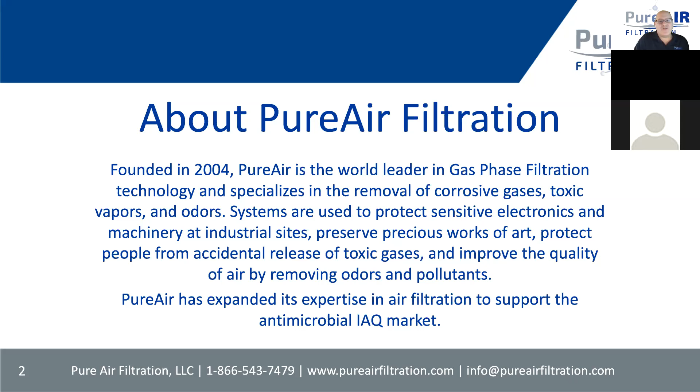I'm the FiberShield product manager at PureAir Filtration, and today we're covering antiviral products for indoor air quality. About PureAir Filtration, the company started in 2004 and is highly focused on gas phase filtration. You'll see why that's important. I say gas phase filtration because we're really focused on tiny particles, atomic level, microscopic, nanometer level particles.

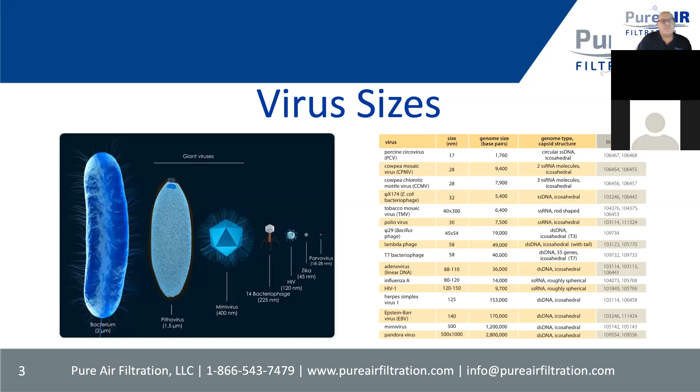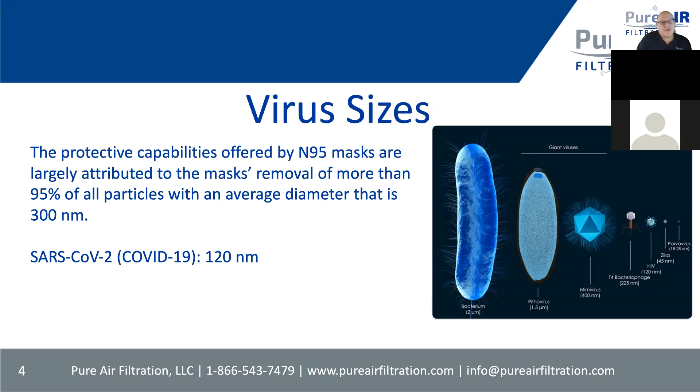Virus sizes are incredibly important. The SARS virus right now that we're all worried about is 120 nanometers. Let's focus on IAQ prior to SARS. Historically, we only focused on particulate and gas pollution, very little focus on microbial air quality. And the microbes were only concerned in hospitals and what have you.

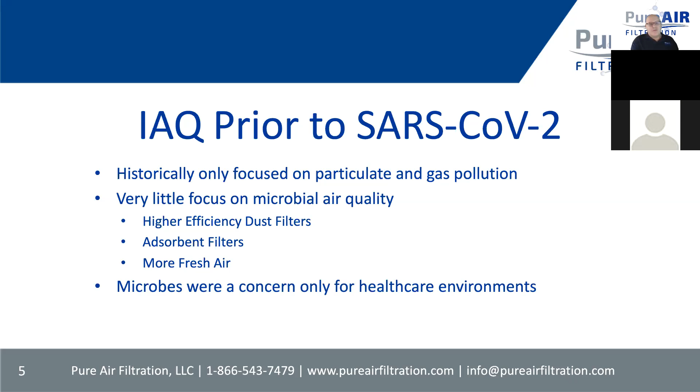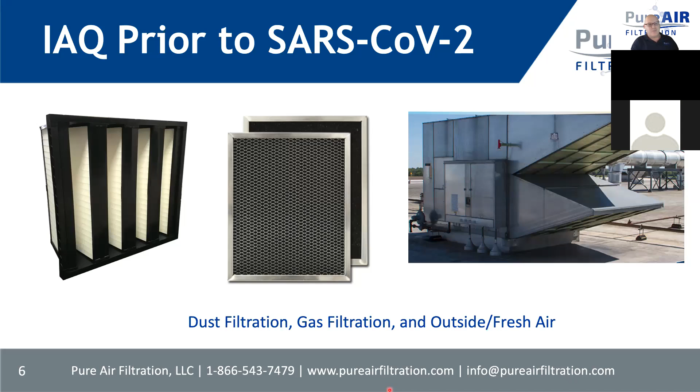These are some typical products that you've seen with dust filtration on the left, gas filtration in the center, and then very large air movers and air handling units on the outside of buildings, moving lots of air, fresh air into the hospital or indoor air quality environment.

So more recently, microbials have become a major factor. We've seen lots of plastic and plexiglass going up in your banks, your grocery stores, everywhere that you go, including restaurants, but it's more increasingly occurring just in the normal workplace where your everyday workers come in and work in an office, not just a hospital, but it could also be a factory, what have you.

The virus of concern most recently is the SARS-CoV-2, which is the virus that causes COVID-19. But we've seen in the past talk about SARS, MERS, even the flu, other common microbials that occur throughout a year. The most recent one has everybody concerned, and rightfully so. But these types of activities have been going on for as long as the industrial world has been working together. As you recall, there was the Spanish flu of 1918, the Hong Kong flu in the 60s, several types of viruses and bacteria like this occur occasionally.

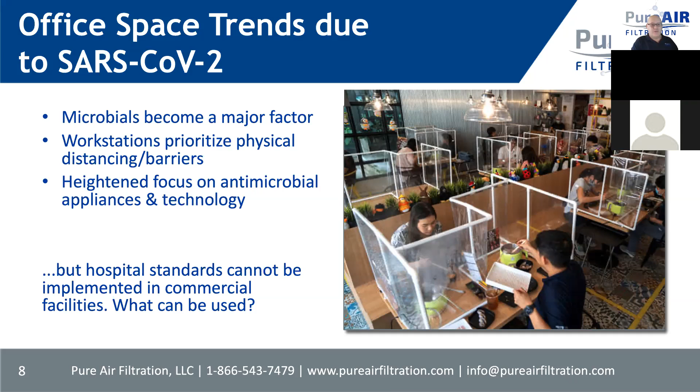We believe that once we get past this SARS-CoV-2 environment, we'll be seeing potentially more antimicrobial activity in offices and companies throughout the world. And that's one of the reasons we're having this webinar today, to discuss some of the solutions that we've developed.

Let's talk very briefly about what ASHRAE has recommended for HVAC modifications. Central HVAC, for more outside air to come in and flush away the aerosolized microbes. You'll find that that's an increasingly common theme here at PureAir, but also in the indoor air quality world, that moving air through the rooms, through the buildings where the people are, and getting more air changes per hour, and that air flushed through filtration systems is really the way to keep the people safe that are in the buildings that we're trying to protect.

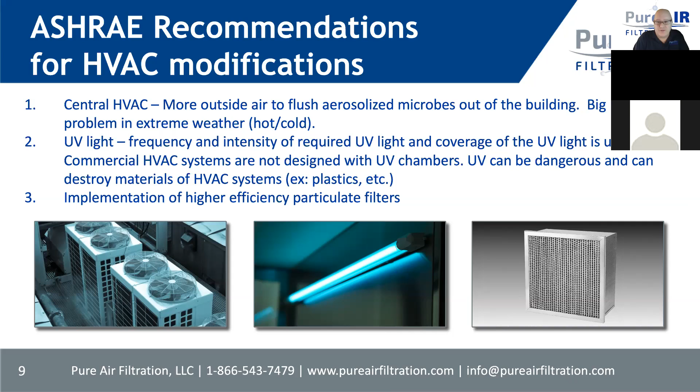UV light has a place in this as well. UV light has been proven to effectively eliminate many microbes, or at least help eliminate them. And then implementation of higher efficiency particulate filters to remove those aerosolized microbes.

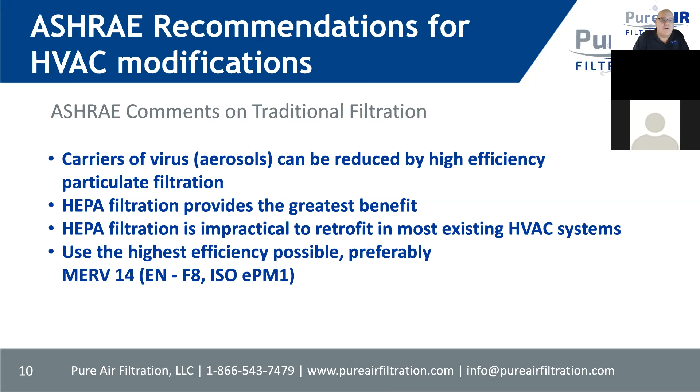ASHRAE recommendations for their comments on traditional filtration: the aerosols that we've talked about and you hear in the news quite often now are reduced by high efficiency particulate filtration, HEPA and the like. At this point, HEPA seems to be providing the greatest benefit. And it's impractical to retrofit these systems into existing HVAC applications. The highest efficiency available right now is MERV 14, generally at a cost point, and that's what we like to see, and that's what ASHRAE is recommending.

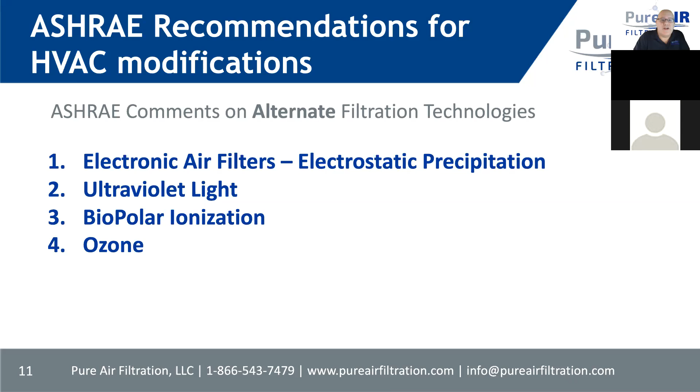So there's 4 alternate filtration technologies that ASHRAE has talked about. Electronic air filters, or sometimes you'll just see the acronym ESP, ultraviolet light, bipolar ionization, and ozone. We actually see ozone more common in Asia, but we'll cover each of these very quickly.

So electronic air filters provide a wide variety of electrically connected air cleaning devices designed to remove particles from air streams. This is a common device. We've seen these deployed more and more in the past 20 years. They do require maintenance, they do require power, so there is some downside to that, but we do know that they do work to a certain degree.

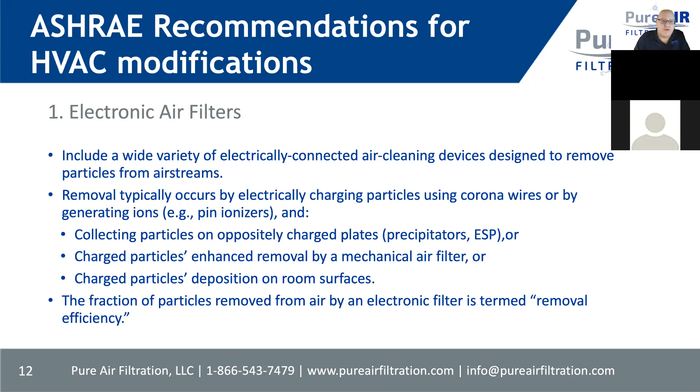The overall effectiveness of reducing the particle concentrations depends on several factors: the removal efficiency, the airflow, the size and number of the particles, which we're hearing a lot more about lately in terms of the aerosolized particles, the location of the filter in the system, whether it's at the beginning or the end or the middle or all three, and then maintenance and cleanliness of the filter components.

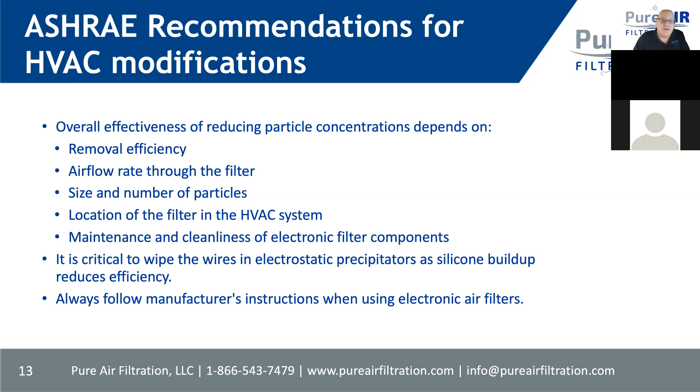I think we all have experience with filters in general, whether it's in your air conditioner or in your car. Filters are not changed as often as they should be, and that's one of the areas that I think will come out of this SARS-CoV-2 era is that people will realize that we need to be changing our filters much more often.

Ultraviolet energy certainly has an application here. We know for sure, particularly UVC in the far range of the UV spectrum, does have an inactivating capability of microorganisms. This has been known for decades. If you remember, probably most people's first exposure to this is in a barber shop or hair salon where UV light is used to clean the combs and scissors and what have you.

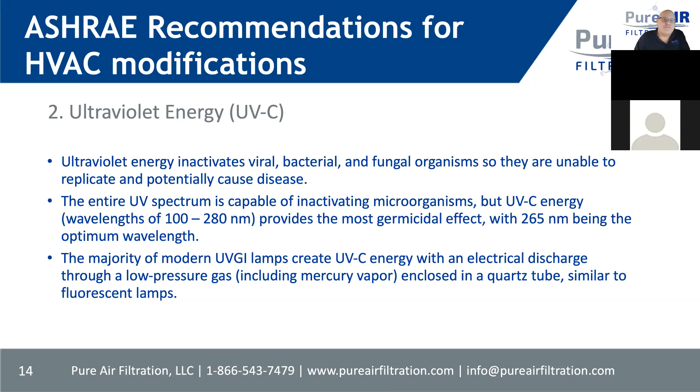But certainly there's applications where UV energy is used in the HVAC system, and there's certainly a place for that. And ASHRAE is looking at it, particularly in the ducts here. Typically these systems are designed for 500 feet per minute or even more. The irradiance zone, meaning where the UV light is and the air has to pass through that, is approximately 2 feet, although we've seen some that are growing now in size. And the microbes need to be in that irradiance zone for at least a quarter of a second. And again, that's at least. And it seems that it's probably more like a half a second now because the air streams are quite high.

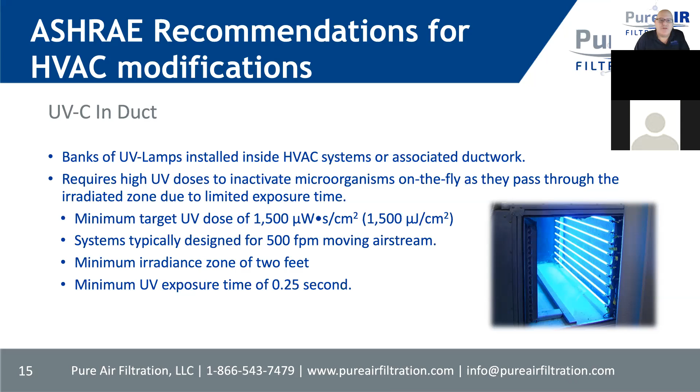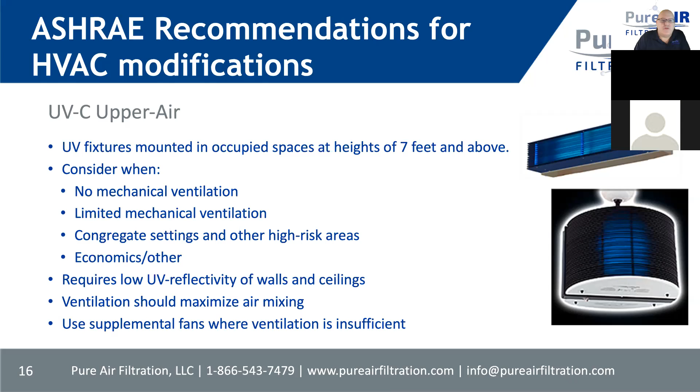In the upper air, we see UV systems in occupied spaces 7 feet or higher, roughly 2.2 meters and higher. These are good when there's no mechanical ventilation available or limited ventilation available. And these might be where, particularly where there's lots of people involved in a room where it's hard to move the air. ASHRAE is suggesting that we put some of these in the facility.

And of course, there's portable models which are coming out. These are not for occupied spaces, by the way, where humans would be. However, they could be moved in during the evening, turned on, and then taken away in the morning before people come in to work or into that hospital room or into that school.

Bipolar ionization and plasma is the third area where ASHRAE is making recommendations here. It's reactive oxygen species based, and it's become a lot more common recently. However, the data from academic research is not yet common here. We don't know for sure what's going on, how safe these systems are over extended periods of use. Nonetheless, there does seem to be some use here, and more companies are starting to put out products like this.

One factor here, which we'll talk about in a second when we get to the ozone, is that we know that these bipolar ionization and plasma systems can emit high levels of ozone. And we have to be very careful with that because it's not healthy for human ingestion of too much ozone, and nor is it good for the environment.

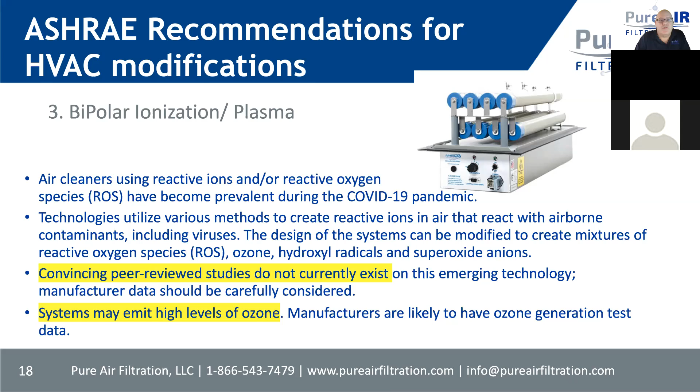So finally, the fourth ASHRAE recommendation is to look at ozone as a possibility here. Ozone generators are used, as I said earlier, more commonly in Asia, although I think that the trend is downward in this regard. It had been more popular in the past 10 to 15 years, but we're seeing more people go to just standard filtration type activities. And we find that these ozone generators should not be used in occupied spaces because it's harmful to humans over time. And as we mentioned, it's certainly not good for the environment.

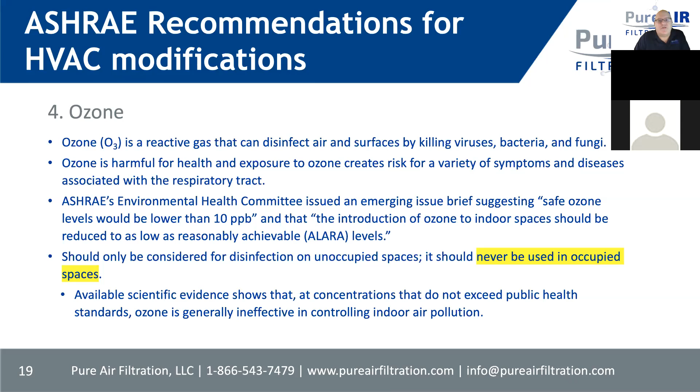Now, one of the primary reasons for today's webinar is to talk about our PureAir Filtration's antimicrobial products. We have 2 new products that are available immediately to be installed in any HVAC system, and we'll cover them in detail now. The first is Microbe-sorb, and the second is FiberShield.

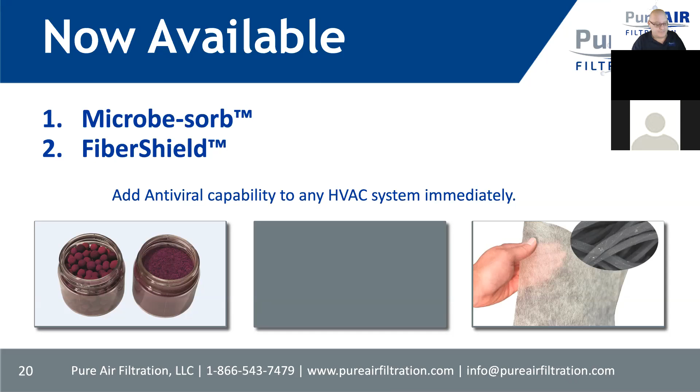So Microbe-sorb. This product is based on our time-tested permanganate-based product, potassium permanganate. And here is a sample. I have a jar similar here. If you're at all involved in the gas phase filtration environment, then you're used to seeing this kind of magenta colored product.

We have specially formulated Microbe-sorb based on a proprietary formulation that has its foundation in our PureAir 12 product, which we've had in our catalog for several years. We've tweaked it through R&D to come up with this very highly aggressively antimicrobial product that can be put into a bed inside of a filtration system easily and very cost effectively.

The typical product size, if you can see, I'll put this up to the camera. The sphere size is about 3 millimeters, between 3 and 4 millimeters. It's an alumina-based product impregnated with the proprietary formulation of permanganate. And we know through decades of research that the product is highly antimicrobial, and as the air passes through the bed of permanganate, any viruses, bacteria, fungi are deactivated.

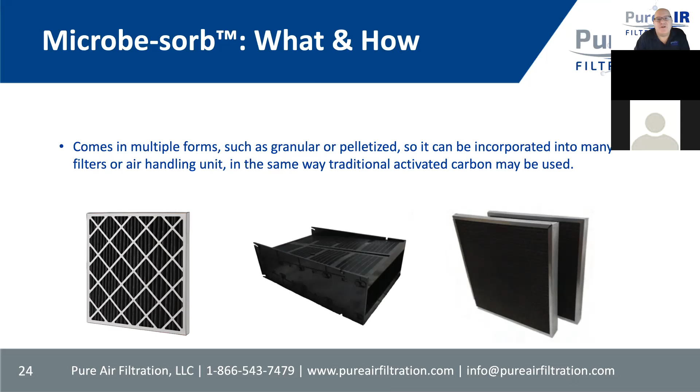So we had this Microbe-sorb tested using the world standard, the ASTM E2149 standard. We had this done at a lab in China, and it came back. This was for H1N1. They were not equipped to test for SARS-CoV-2, but we found that it's greater than 99.83% effectiveness at inactivating the H1N1.

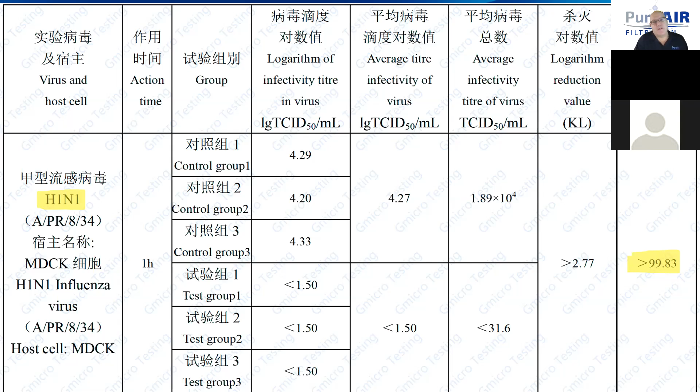The second product I'd like to review is FiberShield. FiberShield is a brand new product that we released only a few months ago. And it's an antimicrobial fiber that can be put into an HVAC system immediately. Here's a sample of it right here. You can see it's quite thin, 34 grams per square meter of this product. We've developed this product jointly with Noble Biomaterials. That's a world expert in the nanofiber market and nanomaterials market.

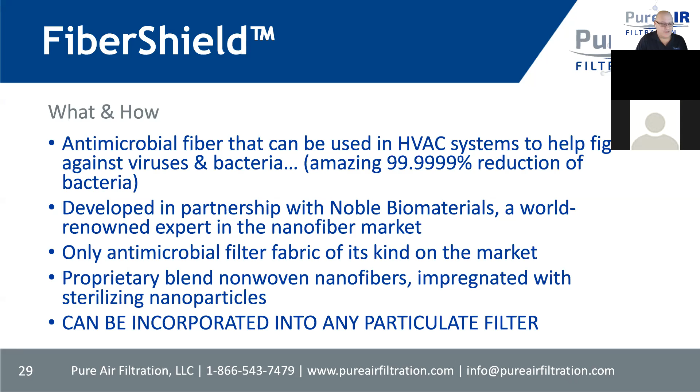It's the only fiber of its kind and the only product that can be put into any particulate filter immediately and provide antimicrobial effect instantly upon installation. That's what it looks like. It's an incredibly strong product. It's nylon 6/6, non-woven, spunbond nanofiber.

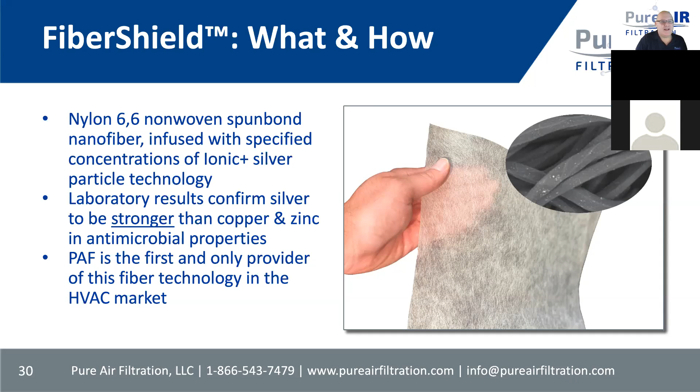We use the Noble Ionic Plus silver nanoparticle technology, which is impregnated into these fibers during the manufacturing process of the fibers themselves. So this is not a coating, but the silver is embedded into the nanofibers. It's the only type of product available on the market right now. And again, it's ready and can be installed immediately.

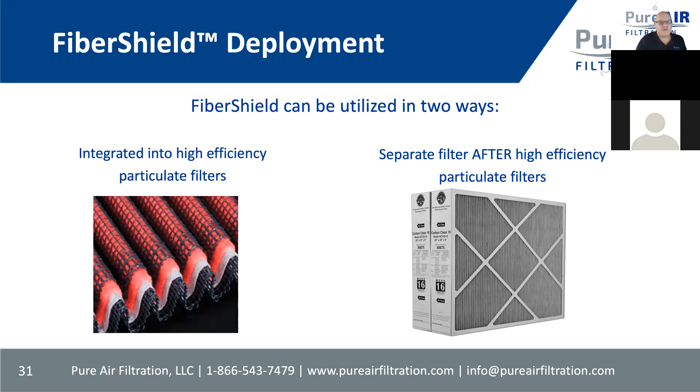Most of our customers are putting the fiber in two different ways, pleating it into a standard pleat like the one on the left, and then inserting it into a regular 24-inch by 24-inch or whatever size filter, and then simply installing it into the HVAC system. We should note that the FiberShield product in no way is meant to be a particulate filter. At best, it has a MERV 4 rating. However, it's incredibly aggressively antimicrobial.

We tested this product with the global standard for antiviral, antimicrobial material fabric test, which is the ISO 18184, which was recently updated in 2019. And that fiber was tested against several different viruses and bacteria. In this case, we were able to test directly with SARS-CoV-2, and the results came back at 99.89% effectiveness. We tested several other viruses, including H1N1 and common bacteria, as well as fungi.

The nylon 6/6 is a fantastic product in that it can handle almost anything that can be thrown at it from a physical standpoint. It lasts a long time compared to polyester and other similar products that it competes against in terms of just the fabric itself. But once it's impregnated with the silver nanoparticles, it's incredibly antiviral and antimicrobial.

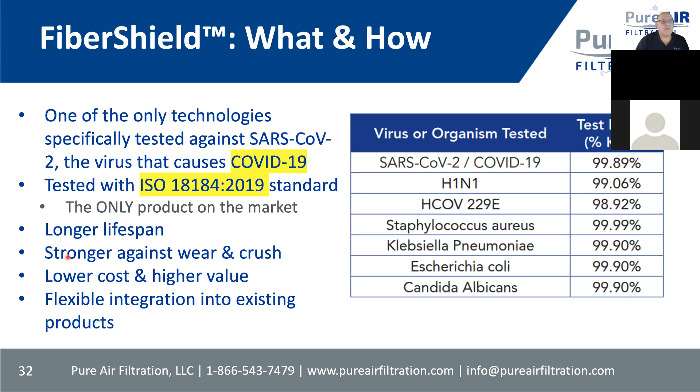The research in silver antimicrobial capability is ongoing throughout the world, but it's been well understood for more than 20 years that silver is highly antimicrobial and extremely aggressive at deactivating viruses and bacteria. There are researchers in every country who can be contacted and will convey that message easily.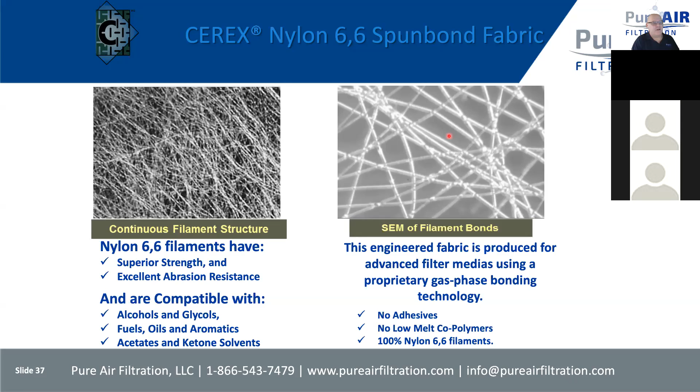FiberShield rolls are available in these widths. We have a standard product of 61 centimeters, 76 centimeters, 152 centimeters, and the roll lengths are up to 4,000 yards.

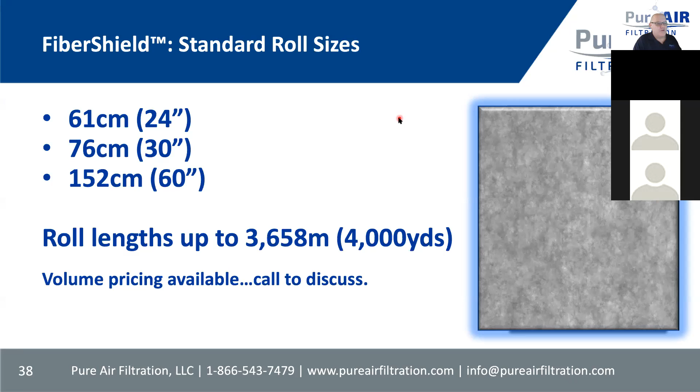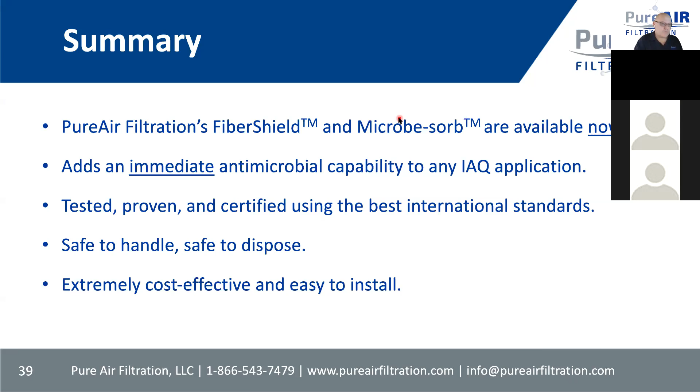Quick summary, the FiberShield and Microbe-sorb by PureAir Filtration are available now. We can ship it tomorrow if it's necessary. These products add an immediate antimicrobial capability to any indoor air quality application. As I've shown you, the products are tested, they're proven, they're certified, using the most stringent and best international standards available at this time. Both of the products are easy to use, they're safe to handle, safe to dispose of, and extremely cost effective and easy to install immediately.